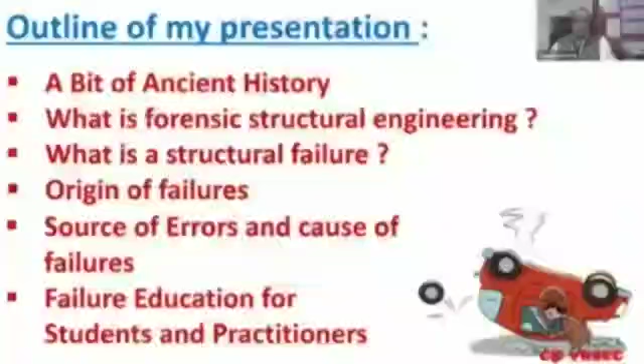First, let me talk a bit about the history. Failure of constructed facilities have been witnessed ever since mankind started constructing facilities. So I will make you walk through the history a little bit. We all know about the Egyptian pyramids. All of us must have heard about it. The Egyptian civilization was one of the richest and most powerful civilizations in the world in the beginning, some 2000 years BC, and during that period the Egyptians used to build pyramids, and we all know about it.

Until about the 18th century, whatever constructions were being done were more based on a trial and error process. There were no qualified structural engineers, so to say. They were builders, and they used to build, and some of them used to fail during construction. They would have learned from the failures and rebuilt with more strength, and that is how the learning process began.

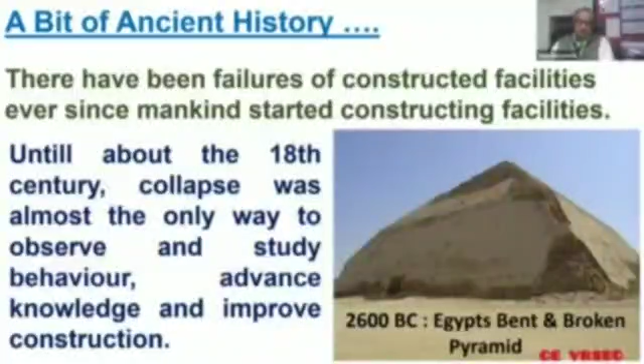Now, these massive pyramids—very interestingly, the history of the Egyptian pyramid is that initially, when they started building pyramids, they used to build them in two slopes. In the picture here, you can see that in the beginning part the slope is around 54 degrees, and then after a certain height they take an angle of about 43 degrees. So initially they started like that, and three or four such pyramids failed, as you can see in one failed pyramid. Subsequently, they changed this design to a single 43-degree angle pyramid, and that pyramid survived. So they abandoned some four or five pyramids like this, and this evidence is available historically. It shows very clearly that learning from failure resulted in a revised design with a different, more stable angle, by which they succeeded.

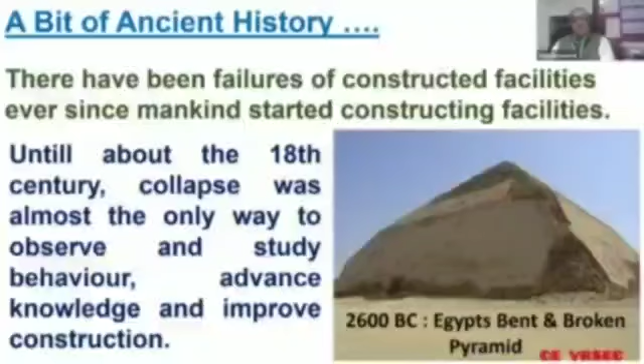Unfortunately, it collapsed only about 50 to 60 years after construction, due to an earthquake. It collapsed in the year 226 BC. But the remains were left there until removed and sold much later, about 800 years later. The Colossus of Rhodes had such a big impact that even today the country is thinking of rebuilding this particular statue, to ensure that the historical story remains. So there is talk now to rebuild this statue even today. By the way, this was the structure which inspired, much later, the Statue of Liberty, which was built in New York.

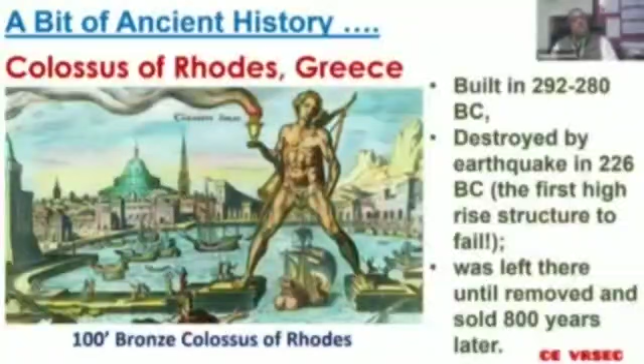The third example I give you is from 480 BC: this bridge of Xerxes, which was built by the King of Persia at that time. The bridge was needed by the king to cross the Strait of Dardanelles in Turkey. This was a link at this point, located at a place which was called the Hot Gates.

This pontoon bridge—you can imagine such a long bridge was being built by tying it with ropes. The ropes were made of plant products. Unfortunately, one fine day, due to a storm, this bridge failed at one or two points. The bridge collapsed, and the king was so angry that he killed the builders involved at that point of time.

He ordered, in fact he was a little crazy, that the strait itself should be punished and whipped 300 times and placed in slavery. But he also then engaged other builders and engineers and finally completed this bridge despite all these odds.

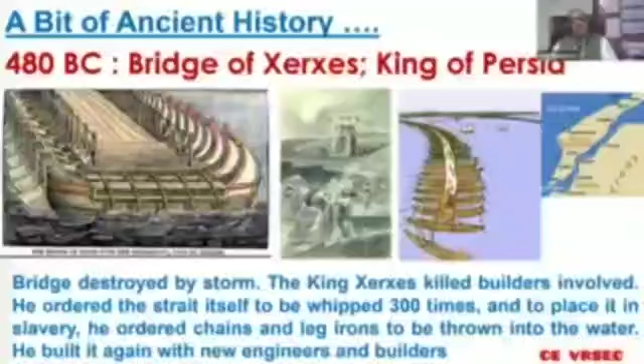Another example of how people have learned from failures is the very interesting case of Hagia Sophia in Turkey, a structure still in existence and very prominent in Turkey. It was originally constructed in 360 BC, and in the last 2000 years it was converted by three different religion groups. Now, at present, this structure exists in reconstructed form, not belonging to any religion, but as a secular sort of tomb.

But in a recent announcement, as late as August 2020, the Turkish president has announced that they will reconvert this from a museum into a mosque. At present, it is basically a museum representing secular credentials, no particular religion. But earlier it started as a tomb, then a church, then a mosque, and now it is a museum, likely to be converted to a mosque again.

A very interesting story - damaged three times and reconstructed every time, and every time there is a lesson learned in the rebuilding.

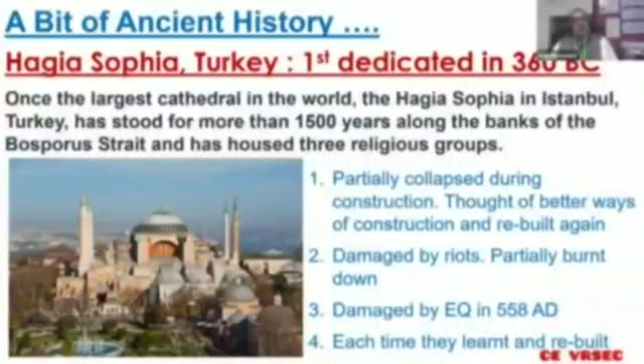Finally, I would end this ancient history by mentioning the famous scientist Galileo Galilei. We all have heard about him, but he seems to be the originator of this concept of forensic structural investigation. He observed several breaking things. He was a master mathematician who had written many mathematical theories, and he realized and put on paper the concepts of bending moment, shear force, and how a cantilever, if you keep increasing it, you need to increase the stiffness of the beam - increase its depth, etc., so that it is stable.

Very interestingly, he related all this to nature, saying that there are very tall trees, and if you compare the girth of that tree versus a plant with a smaller girth, you see how a structure's size and scale depends on its stiffness and flexibility. A very interesting story which is there on paper.

And that is how this concept of forensic structural engineering began historically. This story goes back to 1564 to 1642. So it was in this era when the seeds were sown for forensic structural engineering.

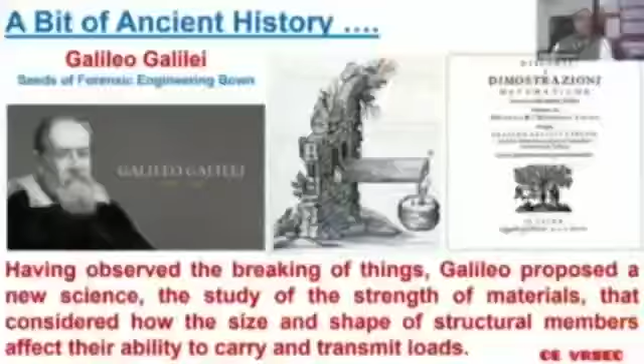Now let me get into more focused attention on forensic structural engineering. What is forensic structural engineering all about? By definition, the word forensic has come from the Latin word, and applies to public forums of discussion, debate, and the administration of justice. So naturally, it is related to investigation - identifying the guilty, and rendering opinions and giving expert testimony.

Whether failure occurs during construction or during their service life, it is almost always followed by engineering investigation and resolution of claims. The findings inevitably create claims of damage and often result in disputes and legal entanglements. Therefore the profession of forensic structural engineering is not merely technical - it is also legal and contractual, and it involves a good understanding of the legal process and ethical issues.

There are so many things - it's a very complex subject, but very interesting and fascinating, because it's not just a question of saying this failed because of this. That is one part of forensic structural engineering. The other part is to identify who is responsible for the failure, and the third part is to render opinions. It also ends by identifying what areas need improvement and what lessons we learn from the failures.

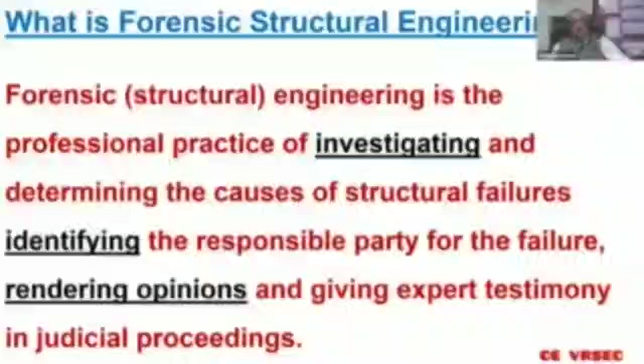Any structural failure that happens causes damage not only to the structure but also loss of life. It involves delay in the construction process - anything with a collapse, the whole process gets delayed by a year, two years, maybe three. It involves loss of income by all stakeholders, disruption of service and traffic, personal injury, and loss of life. And all this, if you want to assess the quantum of damage, finally comes down to money.

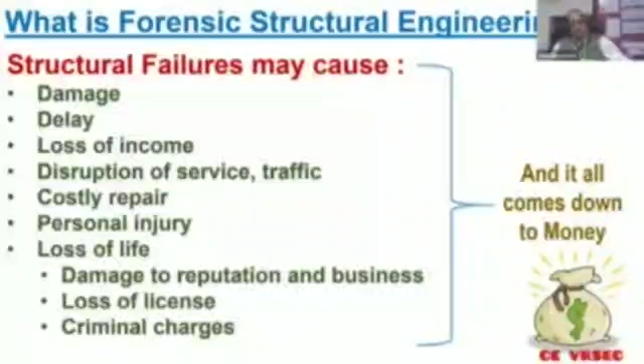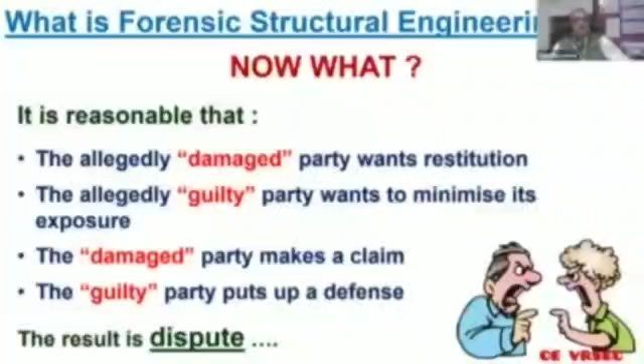Now what happens if there is a collapse? It is reasonable that the damaged party wants restitution. The allegedly guilty party, say the contractor, wants to minimize its exposure. The owner client will make a claim, and the allegedly guilty party will put up a defense. This results in a dispute, and the forensic structural engineer's job is to untie this dispute and bring it to a closure.

The profession of forensic structural engineering is a very fascinating profession. This is one such profession where you have to listen like a lawyer and think and talk like an engineer. Both professions have a role to play. It requires a lot of knowledge and skill, a huge experience of the state of practice, and finally you have to give judgment. So you have to keep your mind open, along with your intuition, passion, education, and training. All these are extremely required if you want to be a good forensic structural engineer.

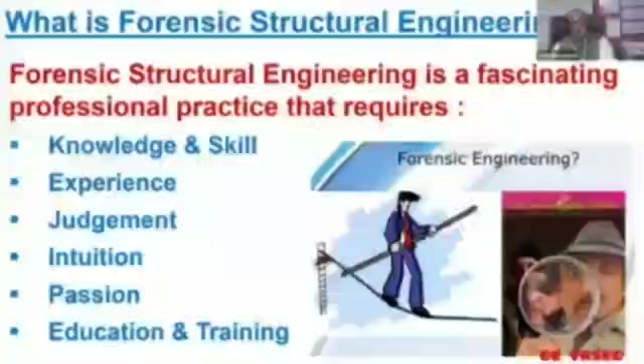It has become an emerging field worldwide because there are a large number of failures all about the world. In India, in the last 4-5 years, we have seen a number of failures. The number keeps increasing with time because of the fast pace of construction, and the kind of attention needed is not given. This results in a series of failures. With time, there is complexity of design and construction, and the need for technical support in litigation is obvious.

There is recognition that failures can be mitigated if we use lessons learned from properly investigated past failures. Every failure gives us lessons, but the question is, are we learning these lessons? Are we really taking action? The idea of this forensic structural engineering course in academia is only to highlight that from every failure we should learn and improve upon it. The number of failures should reduce with time, and mistakes identified should not be repeated in the next case. That is the whole idea of studying case studies on failures.

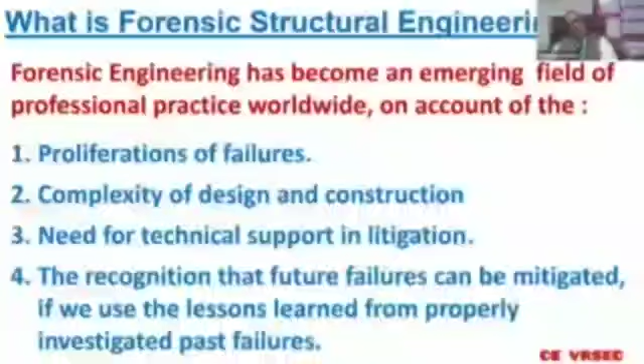In India, in the last couple of years there has been a series of failures. In the last one year I have compiled 6 projects where I am personally involved, somewhere as a designer, somewhere as a review consultant, and somewhere as an expert committee member post failure. Interestingly, all this happened in the last 1 or 2 years. You can see the dates: 22nd August 2020, 15th July 2020, 19th June 2018 - all between 2018 and 2020.

So many large number of failures, and this is only in bridges in the highway sector - this is only the tip of the iceberg. If you see the total quantum of failures, almost every day in the newspaper you see somewhere some building has collapsed, somewhere some bridges have collapsed.

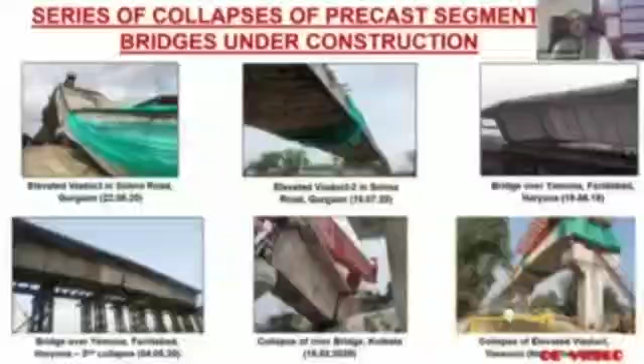Due to the lack of an accredited process for forensic structural engineering at a reasonable scale, unfortunately we are not learning lessons from past failures. There are numerous cases in which individuals have been convicted and sent to prison wrongfully. I remember a case in Mumbai where there was a failure of a pedestrian bridge, and there was so much pressure - media blew it out of proportion - that the very next day the structural engineer was behind bars. An investigation would take place later; nobody knew at that time whether it was really the fault of the structural engineer or somebody else. It is also possible that just as many guilty go scot free because proper investigation does not take place.

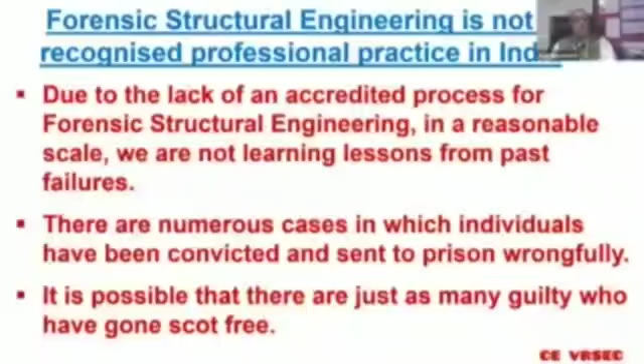So it's very important that the profession of forensic structural engineering is taken seriously.

Now I want to mention a little bit about the standard of care of a professional structural engineer. There is a lot of confusion in this, so I thought it fit to flag this issue. What is standard of care? It is a level or quality of service ordinarily provided by other normally competent practitioners of good standing in that field, when providing similar services with reasonable diligence, care, and best judgment, for the purpose hired, in the same locality, at the same time, and under similar circumstances. Violating this principle is negligence.

Now, what does this mean? In short, suppose a collapse has occurred and somebody is doing an investigation. During the investigation, he or she comes out with a very sophisticated theory of analysis, carrying out a three-dimensional finite element analysis, and proves that the designer did not do the three-dimensional finite element analysis, and therefore in some places the structural stresses are a little high, and that is deemed a fault. That is not what is expected.

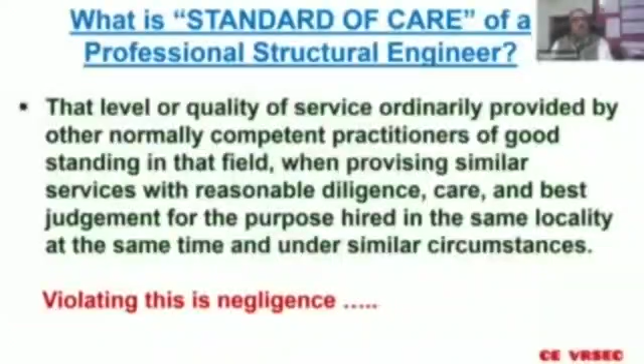The second part I want to mention is that the public and experts must understand that when one hires an engineer, one purchases a service, not insurance. So one is not justified in expecting perfection or infallibility. No engineer is infallible. If you are doing a design, it is possible that you commit a mistake. Structural engineers are not infallible. Only reasonable care and competence is expected from engineers - there should not be negligence.

Within this purview, before you hold a person guilty, you have to understand this. One can argue, how do you prevent mistakes if you say that doing work means you are bound to commit a mistake?

The system should be available to prevent mistakes. That is why when you design, somebody will design, and in the same organization somebody will check it, and it will be approved by somebody else. All three involved have to exercise due diligence, and thereafter it goes out to a proof checker who does his own independent check. All this process should ensure the final outcome is free of mistakes. As an individual, when designing, there is a possibility you may commit a mistake - after all, to err is human - but the system should prevent bad quality of work. This is all we have to understand.

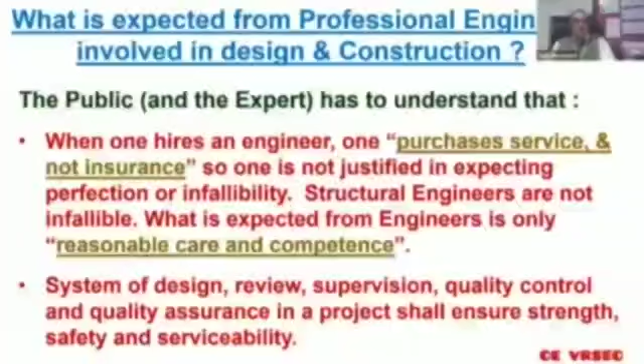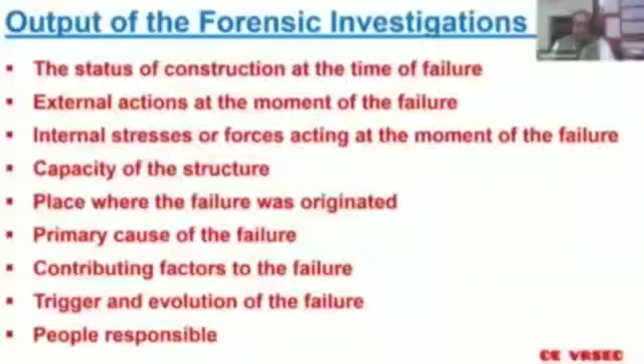What is the output of a forensic investigation? These bulleted points are the likely outputs whenever you do a forensic investigation: the status of construction at the time of failure, external actions at the moment of failure, internal stresses or forces acting at the moment of failure, the capacity of the structure, why it failed, where the failure originated, the trigger or primary cause of failure, contributing factors, and finally who is responsible. This is broadly the outline of forensic structural engineering.

Now let us come to the third part - what is a structural failure? There is a lot of confusion about it. Structural failure is non-conformity with design expectation, or an unacceptable difference between intended and actual performance. It is not necessary that structural failure means a literal collapse. Extensive damage, but no collapse, is also a failure. Local failure is also a failure. If there are signs of distress, that is also considered a failure.

If somewhere there is excessive deformation but no other signs of distress, that is also a failure. Unreasonable maintenance needs - suppose a structure demands frequent maintenance which is unreasonable - in a way that is a failure. Or unacceptable aesthetic appearance can also be construed as a failure.

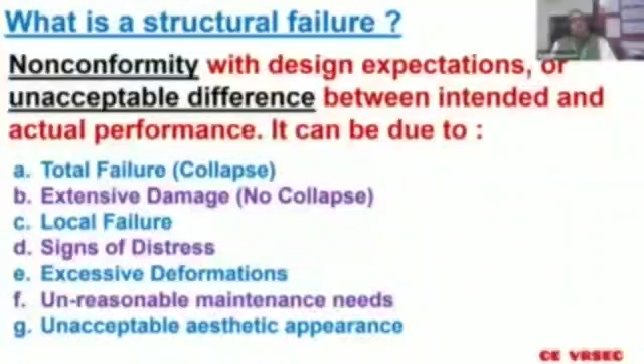Let me give you a real life example of failure. This is the Vivekananda flyover, which collapsed in 2016 in Kolkata. This was a total collapse during construction, and it is considered a failure. In this collapse, some 25 people were killed. The reason was wrong design and detailing, poor material, and there was a ghost contractor who was only on paper an international contractor, but not really involved in the project. This stunning failure was a complete failure of the system.

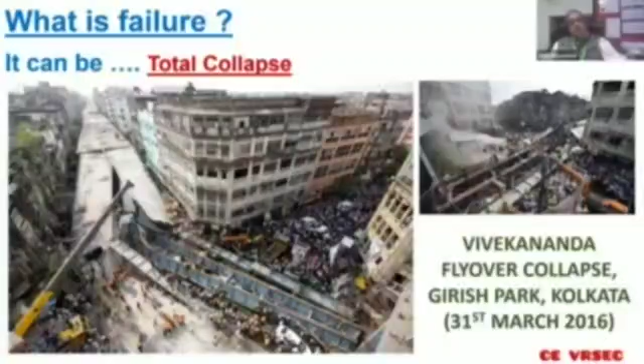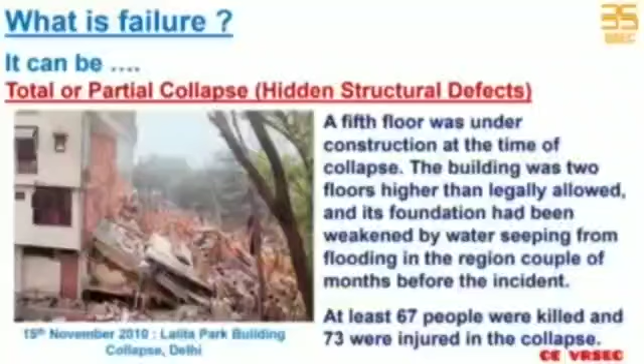Second example where there was a total or partial collapse was a building in Delhi where the fifth floor was under construction at the time of collapse. The building was 2 floors higher than legally allowed, and its foundation had been weakened by water seeping from flooding in the region. 67 people were killed and 73 injured. This happened in 2010, and the failure was caused by prolonged inundation of the basement, seepage through the columns contaminated by sewage water, and bad design and detailing also found to be a main cause.

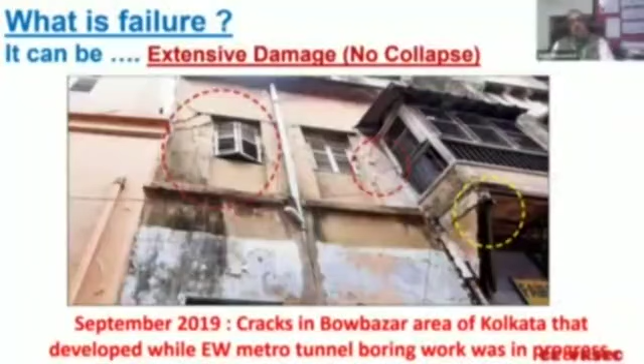This is another example from 2019, last year September. You might remember the cracks in Bowbazar area of Kolkata that developed while the east-west metro tunnel boring work was in progress. Around 250 people had to be evacuated overnight from 13 buildings in Bowbazar area after cracks developed, mainly because of the metro tunneling construction going on.

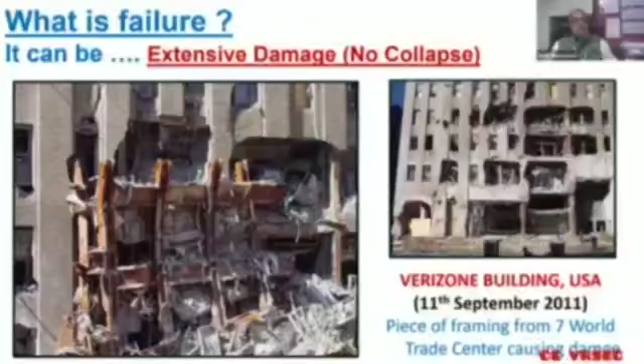Extensive damage but no collapse. This is one example of the Verizon building in the USA, which collapsed during the 9/11 damage of the Twin Towers. The debris from the Twin Towers fell on this adjacent building, and it led to partial collapse of this particular building.

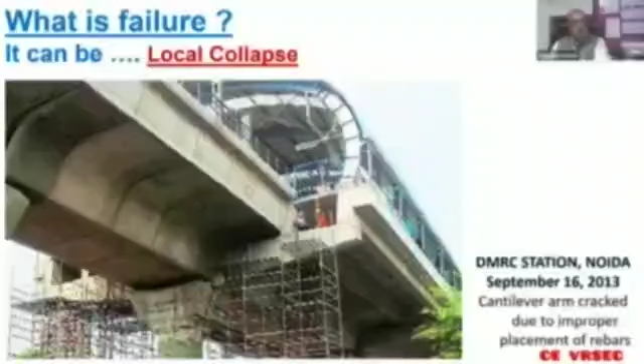Another partial or local collapse: the DMRC station, September 2013, where the cantilever arm of one of the platforms which supports the elevated platform was found to be deflected during a routine inspection check. This had resulted in sagging of part of the platform, and immediate attention had to be paid. So this is also an example of collapse, but a local collapse.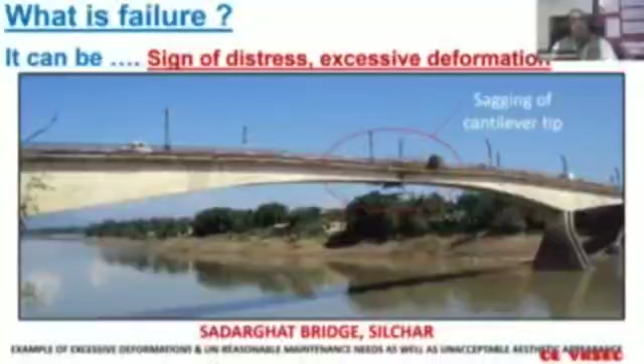Of course, this particular picture that you see is a very old picture - old means about 5 years old - because if I take a picture today, there exists another bridge adjacent to this, a new bridge of similar type, very newly constructed. So there are now two bridges, not one.

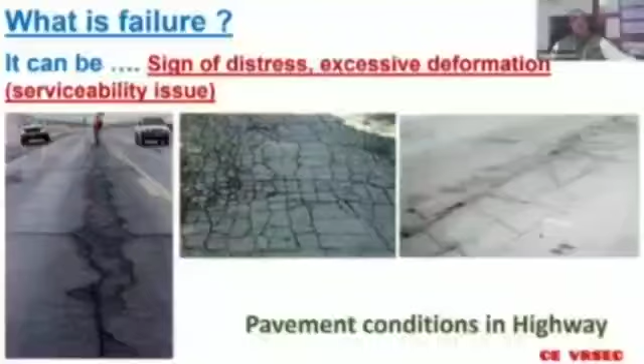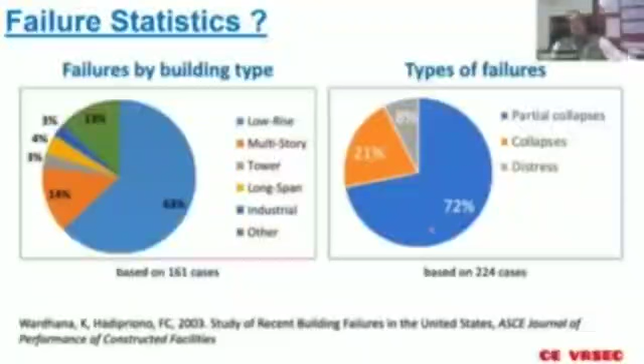Now this is an important graph prepared in 2003 based on an extensive survey conducted in the USA. The gist is that most failures related to partial collapse happen due to certain causes - if you see the second graph on the right hand side, 72% of collapse is partial collapse. And on the left hand side, 63% of the failures are in low rise buildings. So if we have to focus on areas requiring maximum attention, we should focus on low rise buildings and on partial collapses for our study, and to develop our expertise. These are the focused areas requiring attention.

Another study with a very interesting outcome - if you see these risk probabilities of various activities, American data shows that death risk from structural failure in real sense is very, very small. But any structural failure attracts attention of the public. Though the actual deaths due to structural failure are very few, far and few, this dents our image significantly as professionals. And rightly so, because after all people are trusting civil and structural engineers to build safe structures for them. If these structures collapse, then you are actually breaking their trust. Therefore, though the number of structural failures and deaths due to them is too little, their impact is significant, and we should try to mitigate this.

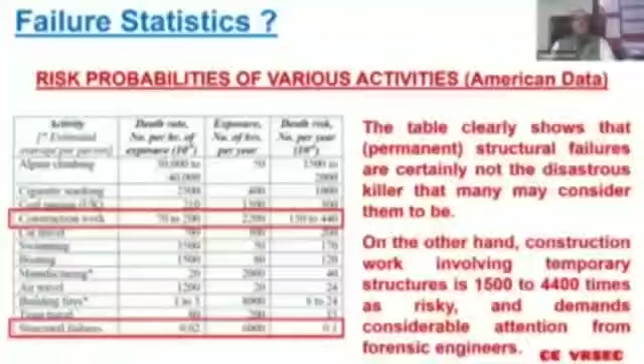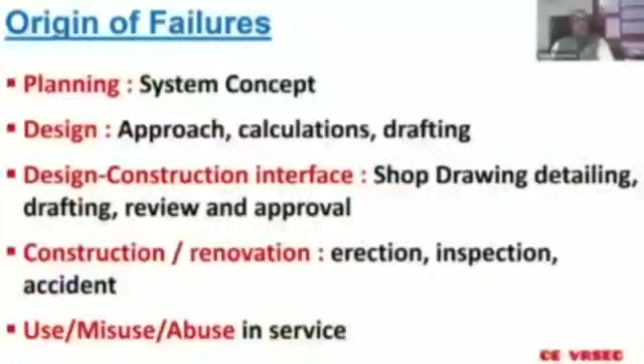What are the origins of failures? Let's get into the origin. The origin of failure can be in planning, in the system and the concept. It can be in design. It can be in the design-construction interface. It can be in construction or renovation, or it can be in service, in misuse or abuse during use.

How does a failure happen? There is a famous model called the Swiss cheese model. If you have seen Swiss cheese, it has many holes, and these holes are not in a specific sequence. So if you stack a few slices of Swiss cheese, very rarely will the holes match.

If a light can pass from one end to the other end with matching holes, that means coincidentally it is a rare coincidence when two or three holes come in one line. In other words, though the trigger for failure can be only one, there are a number of other reasons associated which actually cause the real failure. It is not one reason. Any failure investigation would reveal that there is not one reason for failure; there are a number of other associated reasons which contribute. The Swiss cheese model is a good representation of this.

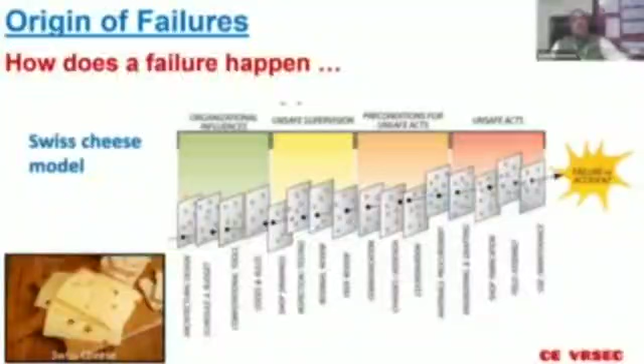Mainly what we need to worry about is human failings. As far as nature's fury is concerned, we can do very little - we can only do a little bit of mitigation. But human failing is something we need to definitely take care of.

These human failings can be negligence, incompetence, oversight, or carelessness. It can be greed, disorganization, miscommunication, misuse, abuse, or neglect. Many times we are using the facility for purposes beyond its design intent, foregoing preventive maintenance. So that is also misuse, abuse, and neglect.

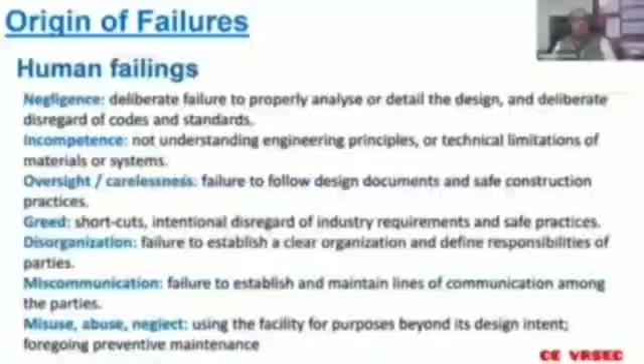Let's go to the source of errors and causes of failures - when, where, and why? As I said before, errors can occur in the very first place at the conceptual design stage itself, or in the detailed design phase, or in the construction phase.

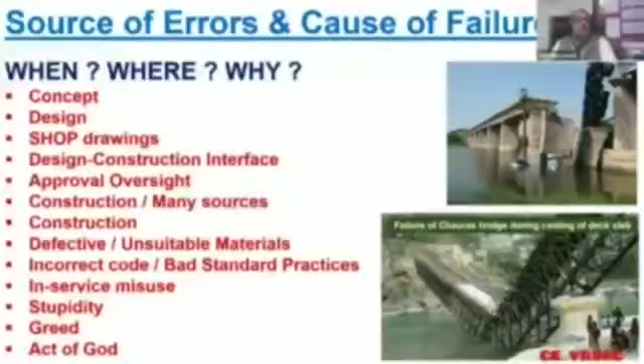When we talk about design errors, we can have errors in the concept itself or a bad approach. These are the various possible design errors: a bad concept, bad approach, wrong assumption, assumptions not realized, wrong action taken, wrong strength, unrecognized load path, no continuous load path - meaning the flow of forces are not there - bad numerical analysis, poor detailing, and the like.

There can be omission also - omitting a particular action, omitting a particular behavior, omitting details in drawings. There are glaring examples where the shop drawing is faulty with respect to the detailed drawing - the detailed drawing is correct, but the shop drawing is wrong, and this led to failure.

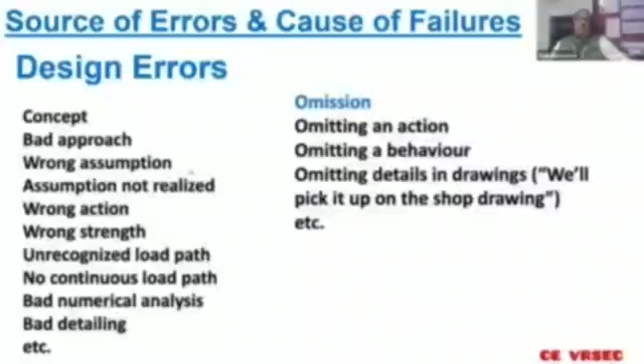Let me give some examples of design errors. This is a failure which occurred in India, in Surat, around June 2014. A flyover collapsed, 10 people were killed, and this failure occurred due to error in design, wrong concept, and bad numerical analysis performed by a very junior level engineer, which was not checked at senior level at all. This is a system failure of the procedure itself. The bridge had a very sharp curvature, as you can see in plan.

The design was done by this junior engineer by making it straight, ignoring the curvature, and he simply added some 20% to account for it. So the behavior itself was not understood, because the moment you have a curvature, there is an overturning tendency, and some of the bearing supports were in tension, whereas if you make it straight, you get all the bearing reactions as positive. Even if you increase by 20-25%, that will not reflect the actual behavior. So it simply failed when the staging was removed.

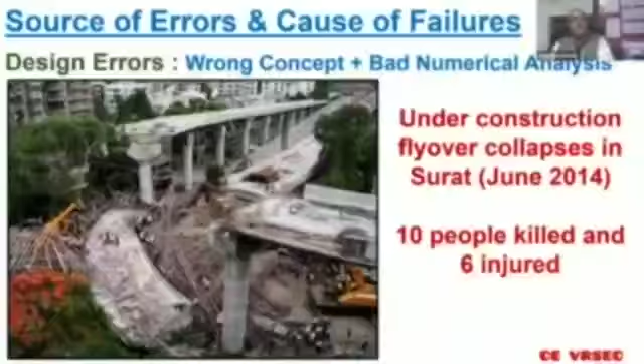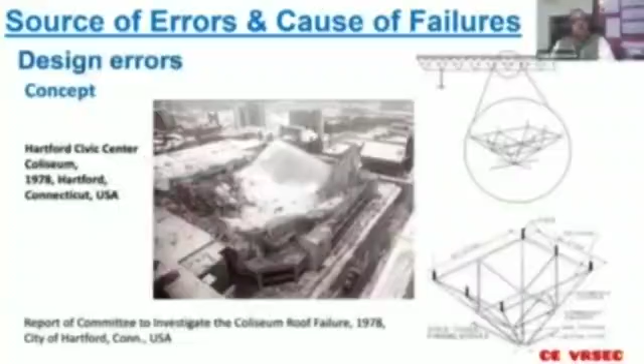Another very famous case is the Hartford Civic Center Coliseum, which failed in 1978. I'm going to give a detailed lecture on this case study at another time - it's part of the curriculum. What happened is this failure occurred after 5 years of construction due to very heavy snowfall. Though when the investigation happened, it was found that the design snowfall height was much more than the actual snowfall height. So the real cause for failure was actually a design error.

The steel space truss pyramidal model, which you can see in this slide, was wrongly designed, and there was a problem of buckling slenderness - the slenderness ratio was not calculated correctly. We will go into details later, but suffice it to say this was a failure of wrong design, a very bold design. This was the first roof structure of a gigantic size, 300 feet by 360 feet, done for the first time when it was constructed with a computer - till then, computers at such a large scale were not used in design.

There were some papers which boasted that this was the first computerized design of a roof truss. But unfortunately that proved to be a blunder, because many of the errors could not be identified at that time because it was done by computer. It was garbage in and garbage out.

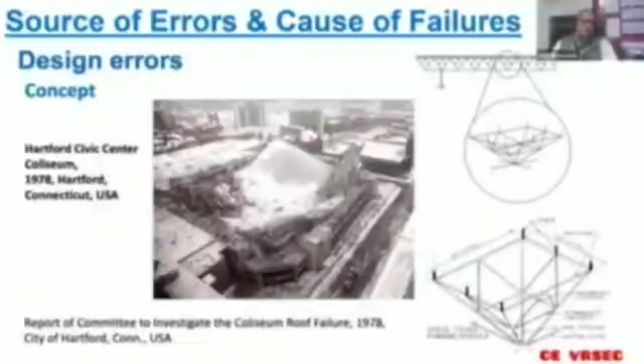Next, this is another design error due to wrong assumption. This was last year in Karamanasha Bridge in UP, on the border of UP and Bihar. I visited the site the day after the failure, and it was a very interesting case. You can see the articulation failed incidentally after 10 years, and at the crack there is no reinforcement, no apparent reinforcement. So after visiting the site, I was wondering how the bridge could survive for 10 years with practically no reinforcement there.

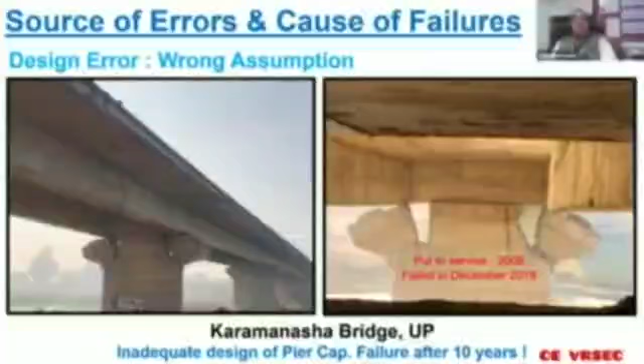Anyway, I will skip that slide.

Now, there is another very interesting case of Millennium Bridge in London, UK, a three-span continuous bridge which vibrated very unusually at the time of inauguration. At the time of inauguration, there were a lot of pedestrians. This is a pedestrian bridge, by the way. The people realized that the bridge is vibrating laterally, and it was a cause of concern, and the bridge was closed after the inauguration. After detailed investigation, it was realized that the transverse frequency, the natural time period of the bridge, was matching with the pedestrians' natural frequency, and therefore this was a design error. Finally, they used friction mass tuned dampers to mitigate this vibration, and then the problem was solved. After 2 years, it was opened again.

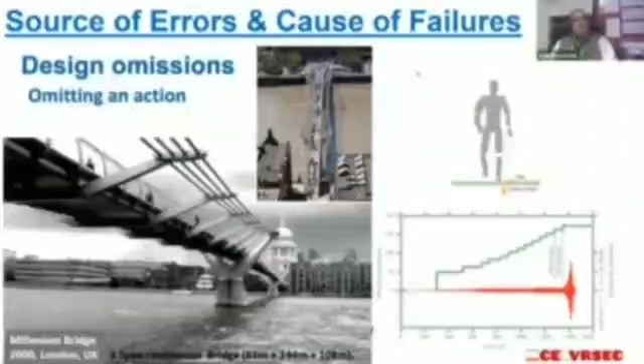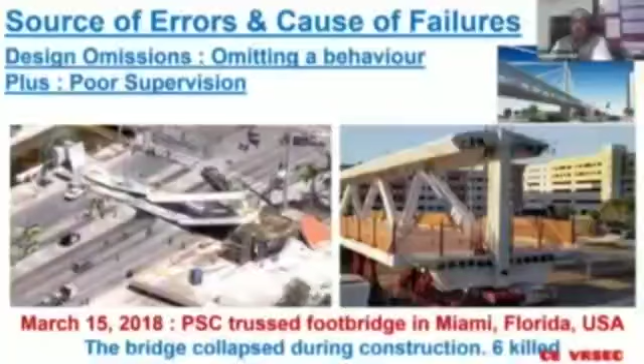This is a bridge in Florida, and it failed during erection. It was a very interesting, iconic sort of pedestrian bridge, where all the cables you see in the photograph are cosmetic. Actually, it is a pre-stressed concrete truss bridge, and it failed during erection of this particular span. Subsequently, when the investigation happened, it was found to be a design omission, underestimation of the demand, overestimation of the capacity, and poor supervision by the engineer of record. This is also a very good case study, and if time permits, in one of the subsequent lectures, I can cover this in great detail.

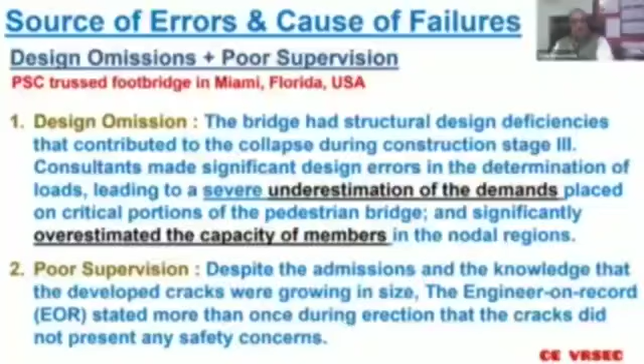Very interesting case: error in shop drawing. There are glaring examples of error in shop drawing I can show you. This is a bridge which collapsed in 2019 in UP. In fact, I visited this particular site the very next day, and I found that the error finally was found to be when the designer converted from design drawing to shop drawing. In the shop drawing there was an error, because of which the welding was done wrongly. Location where welding was required to be done was not done, and location where welding was not required, it was done. It was reversed, and that caused the failure of this particular ROB, rail over bridge.

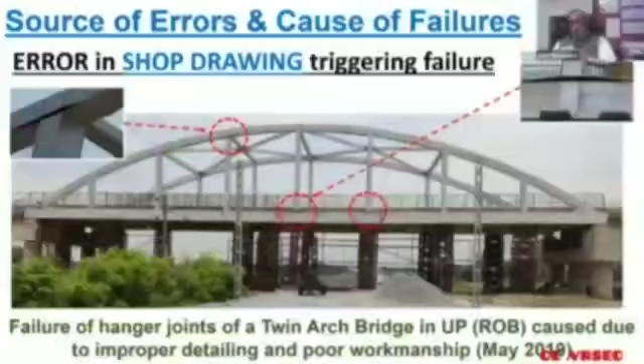You can see some of the photographs here. In fact, there should have been welding here in this zone; instead, the welding was here. There was no welding here, there was no welding on this side, and that caused an opening up at the tension chord, both at the top as well as at the bottom.

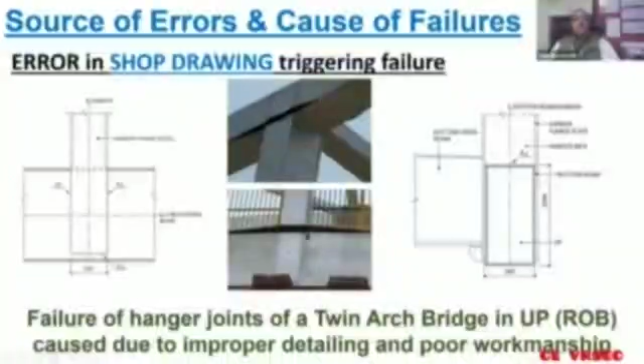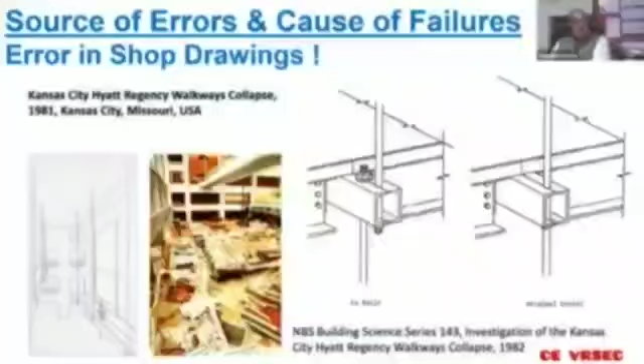Now, this is a famous case of the Kansas City Hyatt Regency walkway collapse. This is a very famous, well publicized case, and a lot of papers are there about it. Again, if time permits, this can be a good case study for the students. What happened here is, according to the original design, the hanger of the suspended walkway was supposed to be continuous and act the way it is shown in the middle one. It should have been like this, as shown originally - sorry, as shown on the right hand side - the same bolt has to go right through like this. But during construction, the contractor, due to some difficulty, suggested a change: instead of doing this, why can't we do this? The designer, without much thinking, approved this connection, and this was the root cause of failure, because on this nut the actual force becomes double, and this caused the failure when actually there was some function going on, and all the guests were on the balcony watching this particular function, and that caused the collapse. It was serious - I think a lot of casualties. Some 114 people died in this.

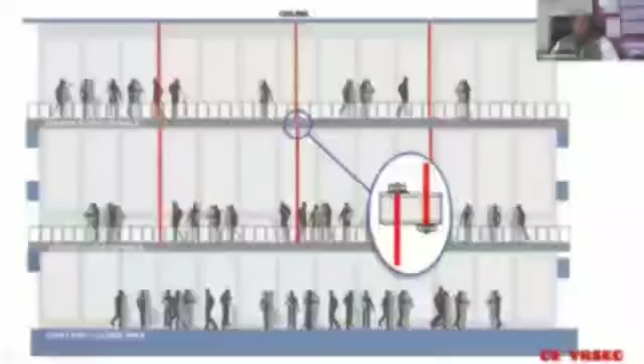So I think this makes it more clear. This particular tie was supposed to be continuous from one end to the other end with connections, and the nut was supposed to carry only one floor load. But once you make it staggered like this, it has to carry the full load, and therefore the change in connection led to collapse.

There can be construction and renovation errors also, inadequate or ambiguous drawings, no interaction between designer and contractor during execution. This is very common. The designer gives some design, the contractor during execution does not interact with the designer, and makes some assumptions.

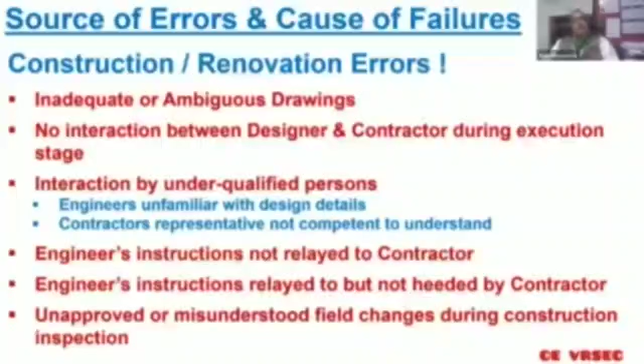So there has to be proper document control in the interaction whenever there is a change which the contractor wants at site from the original design. Many times the engineer's instructions are not relayed to the contractor, or relayed but not accepted by the contractor. Unapproved or misunderstood field changes during construction inspection - all these are very common. I can tell you, those who are involved and experienced in day-to-day design and construction will feel these are very common.

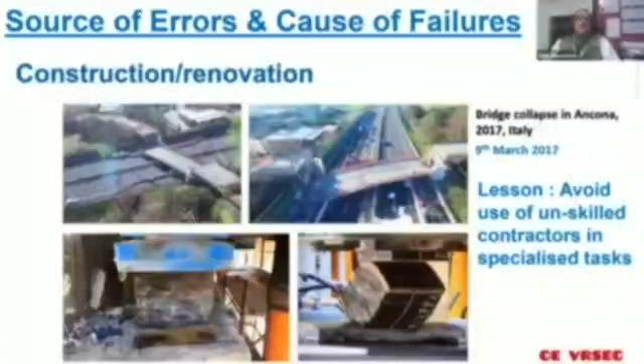This is another bridge collapse in Italy, which happened because the bridge was supposed to be lifted and the bearings replaced. But during the lifting of the bearing itself, it collapsed, and this is because of very poor handling of the repair, rehabilitation, or lifting job by the subcontractor involved.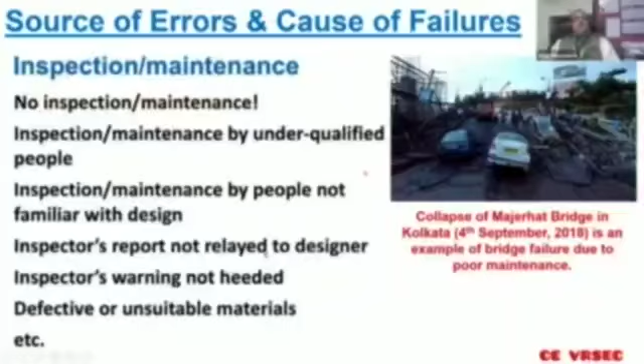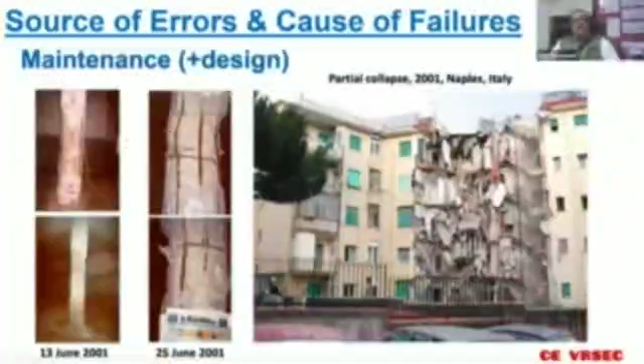Another example of in-service misuse in Italy, where it collapsed simply because one of the occupants of the second floor removed interior work in his own flat. He removed one of the columns, thinking it was a redundant member, and that led to the collapse.

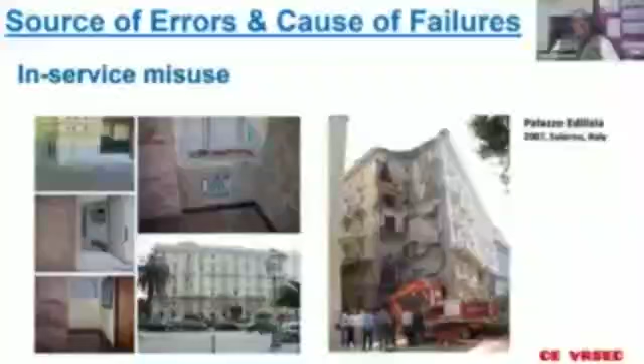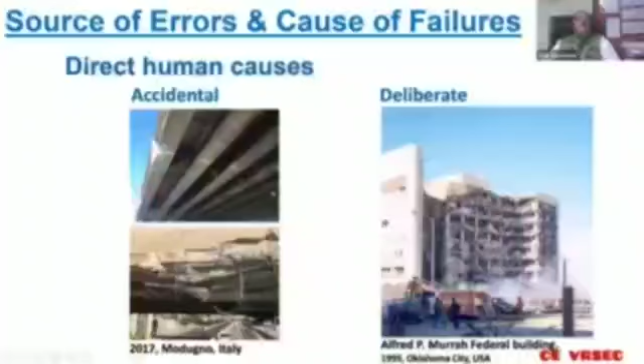This is another case - just an example of accidental failure. Sometimes vertical clearance is not available, so over-dimensioned vehicles can go and hit structures, as you can see in this example. The third one is a deliberate case, due to blasting - this happened in 1995 in Oklahoma City, USA, where the building was basically blasted by terrorists. Such human causes can also cause failure.

Now, just a couple of slides to define what is act of God, because there can be failure due to act of God - a flood in a particular area, unprecedented flood, which can cause failure, or an earthquake of very severe magnitude. But what is act of God? We must understand - the dictionary definition of act of God is an unforeseeable or inevitable occurrence, such as a tornado, caused by nature and not by man.

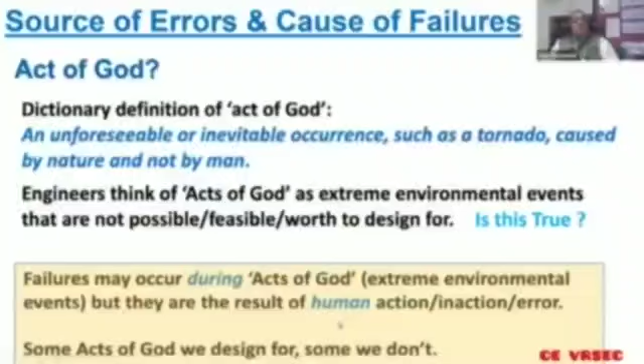Engineers think of acts of God as extreme environmental events that are not possible, feasible, or worth designing for. Is this true? Failures may occur during acts of God. Some acts of God we design for and some we don't - for example, earthquake is also an act of God, but we design for earthquake. Unless there is an unprecedented earthquake of very high magnitude not covered by design, we cannot call it an act of God.

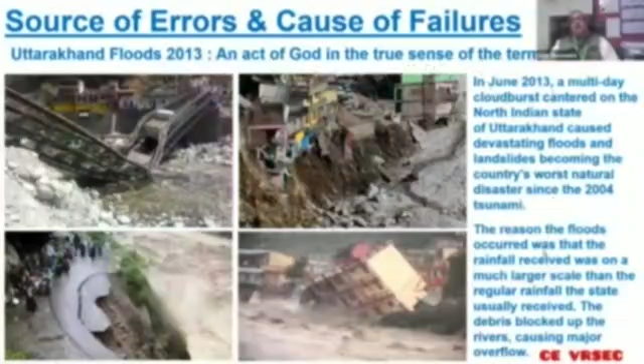The Uttarakhand floods, for example, is a true act of God in the true sense because it happened due to some unprecedented event, though there were of course man-made reasons also for the extent of damage. But the flood was unprecedented, and that caused a lot of collapse, which can truly be called an act of God.

This is one example where after the earthquake in 2002 in Italy, all the structures are standing, but one particular building collapsed. Will you call this an act of God? The answer is no, because if it was an act of God, all the buildings would have shown some sign of distress. Why only one building? So a lot of engineering judgment has to be applied as a forensic structural engineer when you see such a case.

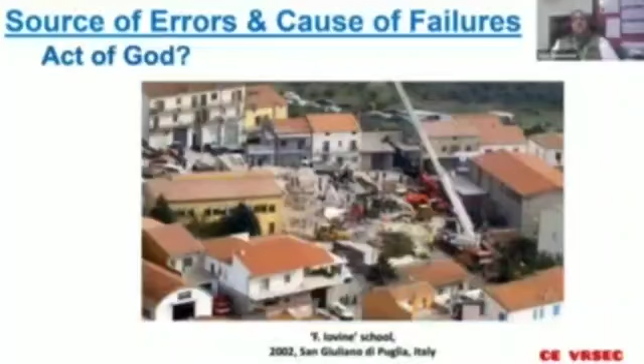Now let me come to the last part of my presentation, which is failure education for students and practitioners. Failure education in classroom has a lot of challenges, because the roadblocks are lack of availability of quality failure data. In India, unfortunately, you will see in many of my presentations that the data I have given are from outside, because in India the failures are not documented well.

So we do not have much quality failure data from our own country. There's also a lack of availability of course instructors with significant practical experience to teach forensic courses. Despite these obstructions, some institutions are offering forensic courses and incorporating failure information into their curriculum. I must congratulate Siddhartha Engineering College for having a course on forensic structural engineering, and I can tell you this is the future. I think you will see huge demand for forensic structural engineers, or a person with educational background in forensic structural engineering, because of the speed with which we are constructing buildings, bridges, and infrastructure—there will be more and more failures and more and more need for investigation.

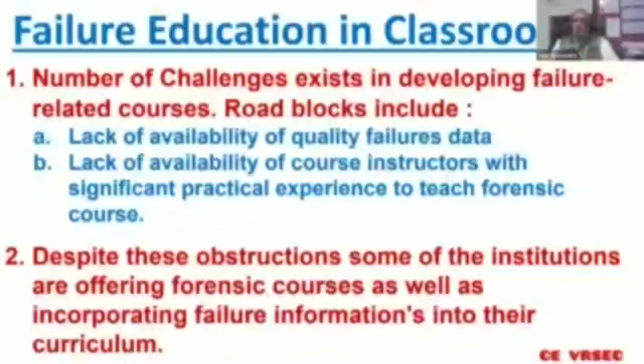For practicing engineers, failure education takes a number of different forms: structural and forensic related conferences, workshops, webinars, continuing education programs, and self-study. So there are two targets. One is the students, for whom in academic institutions we should have lectures, good course trainers, and good documentation or case studies of Indian failures. Though we have many from overseas, we should have more Indian failures.

As far as practicing engineers are concerned, they also have to learn this art, through forensic related conferences, workshops, continuing education programs, and a lot of self-study. The goal for practicing engineers when studying failure is not to become a forensic engineer, but to learn from failures in order to become better engineering designers. It's not necessary that you're learning forensic structural engineering just because you want to become a forensic structural engineer—there are so many lessons you learn from failure that when designing yourself, you can take a lot of cues from your studies.

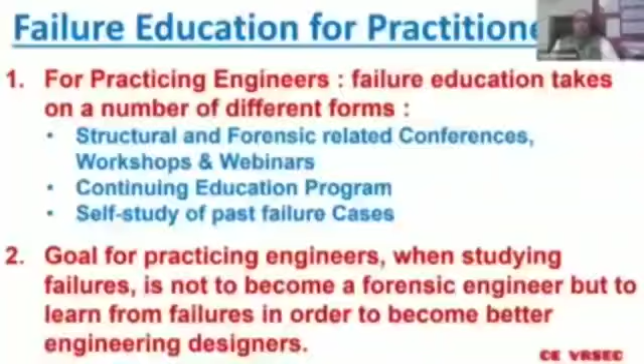There are several guidelines available, and I think the American Society of Civil Engineers is the pioneer in the study and field of professional practice of forensic structural engineering. There are so many documents published by ASCE which are extremely useful. One such document is the Guideline for Forensic Engineering Practice. It describes how to carry out this profession, how to do forensic structural engineering, what all you need to take care of, and also covers a lot of case studies.

There are many reference publications of failures and failure education. This is a list of those, and in fact, many of these are available—just go to Google and you will get many of these books, freely downloadable. Not all, of course—some you have to buy. For example, this one I had to spend some 5,000 rupees to get from the US. Though it's a very thin book, it costs a lot.

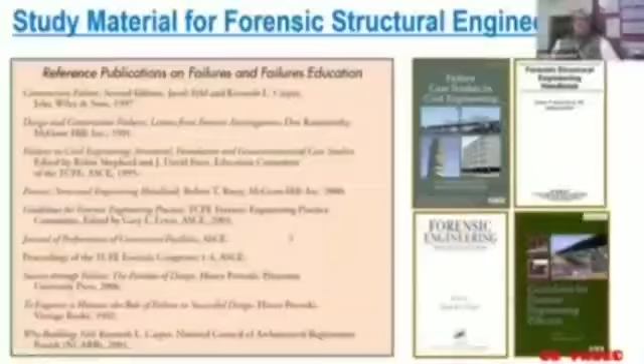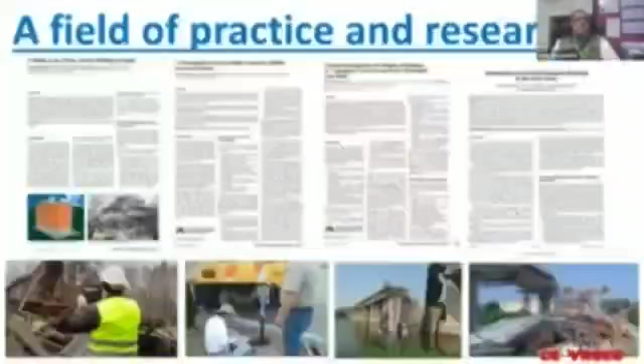There are organizations offering failure-related publications, trainings, and workshops, and most of them are in America. But if you go through their websites, you can attend the conferences—you'll come to know when these conferences are happening, and you can attend some of them. They may cost you, but it is worth it, I can tell you. There are several research papers available in IABSE or FIB on forensic structural engineering, and each and every paper is very, very interesting, because the real structural engineering is when you study forensic investigation reports.

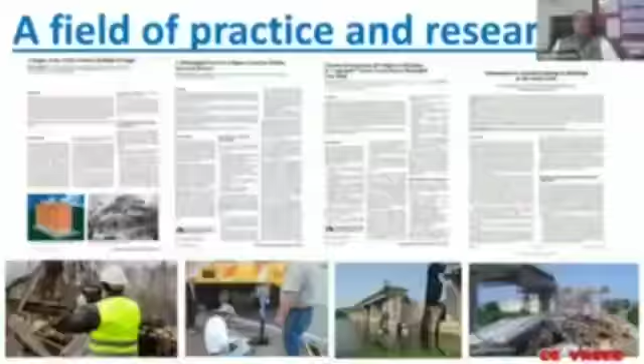I will conclude by saying: never pass a failure without learning from it. Never discard what you have learned without using it. Always walk through the door of opportunity opened by a failure, and look for improvement.